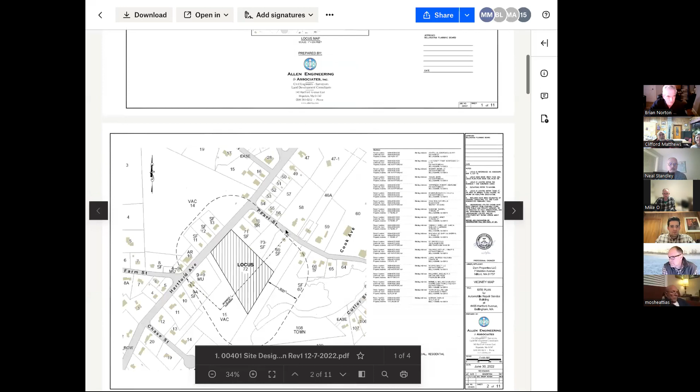Certainly. Okay, Noel, you on that? Yes, you are. Okay, everyone see this? We can. Yes. Okay, excellent.

So one of our big plan revisions was in the back of the lot here. We bumped our limit of work outside of a 50-foot buffer zone to this IVW back here. You can see the little grass icons, that's our isolated vegetated wetland. And then this ND line, that's the no disturb 25-foot. And then we have an additional no disturb area out to the 50-foot buffer due to an old certificate of compliance condition that we're adhering to, to stay outside of the 50-foot buffer zone of this IVW.

And then, as we've known before, there's this additional no disturb area in this hatched area and another no disturb area over here. So we've removed work from this area. There used to be parking lot within this 50-foot section, and that's been pushed out of the 50 now. So in order to do that, we had to propose a retaining wall. So now we have this retaining wall back there with the main development over on this side and natural area over here.

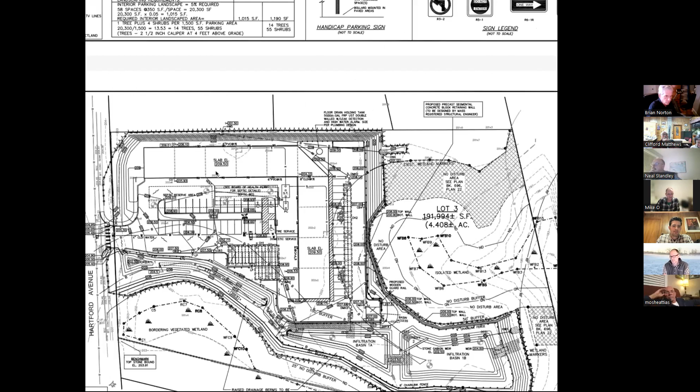Additionally, on my part with the wetlands side of things, we added mitigation plantings for our disturbance within the 100-foot. We added the mitigation plantings within the isolated wetland, within the buffer zone to the isolated wetland, and within the bordering vegetated wetlands over here closest to the road, as well as in the 25-foot no disturb buffer zone we beefed up. So we have a planting plan down here that shows the plantings in these areas.

So I picked these spots because closest to the road, that area has some bare spots where we can add in some plants and create a more robust buffer zone between our stormwater systems over here and the wetlands here. And there's also space in the wetlands themselves to add in some plants to really create a little robust wetland area here so that it can protect the rest of the wetlands further away from the road.

Then over here in the isolated wetland, if you guys have ever been to the site, it's kind of a barren isolated wetland. There's a couple shrubs here and there and some red maples basically at the corners of all these flags. So there's a lot of space to add in plantings in there to create wildlife habitat and really add some protection to the isolated wetland. And just to beef up the buffer zone around it, we added some additional tree and shrub plantings around there as well. So that sums up my wetlands related tasks.

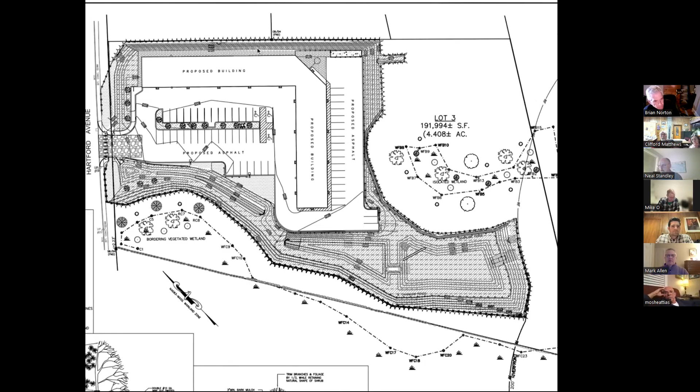Mark, would you want to take away maybe some of your comments that you addressed from the engineering side of things? Yeah, absolutely, Mitch, thank you very much. Is it possible that I could share my screen as well? Yep, let's see.

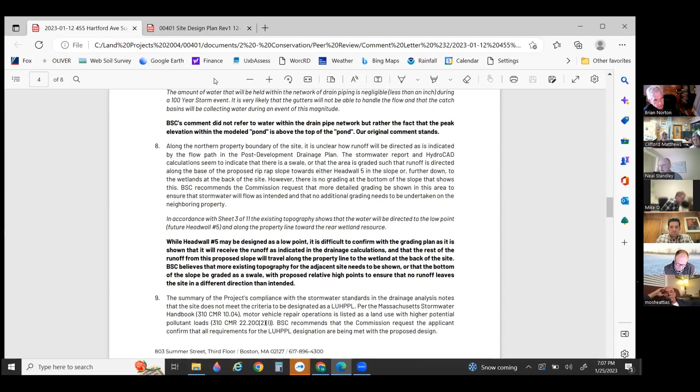Mark Allen with Allen Engineering Associates, representing Moshe Attias, following up on the comment revisions due to the BSC comments. Most notably, as Mitch indicated, this retaining wall has been shown to retain the soil from being within 50 feet of that isolated vegetated wetland.

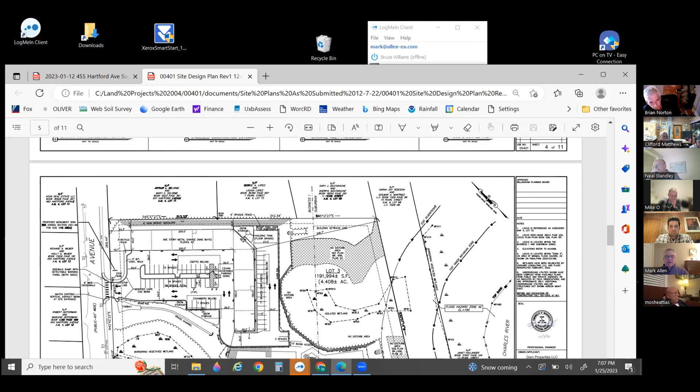That wall will need a guardrail. We've extended the guardrail along as such so as to prevent any sort of vehicular or pedestrian falling issues off that backside.

One of the other items that came out of the report was the slope along the northerly side. This is a 1.5 to 1 riprap slope. It will need to be designed by a geotechnical engineer. I've noted that on the next set of drawings. I think there'll be one more set of drawings after tonight's hearing. But that 1.5 to 1 slope is in this location.

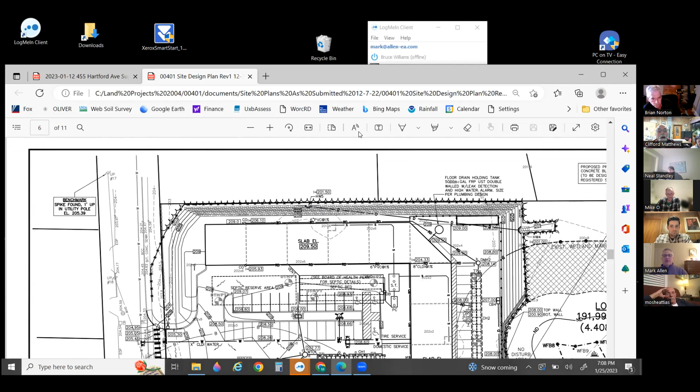Staying on this slide, there was another comment about the ability for the ground to take the amount of surface water that comes into this location. I'm going to scan down to the grading and drainage plan. This head wall is connected to this inlet. One of the comments was, through engineering, could we more accurately show either via spot shot, which is what I tried to do at the last iteration,

show more of a defined swale. So in these tiny little numbers that you see here, it definitely shows that the water will collect behind this riprap slope and into this area. But I can either add more 1 foot contours off site and simply add a swale to show that the water is going in that direction.

Yeah, Mark, if I may interrupt. I think it's important to show us what the offsite grading is, because we really don't - I don't see the numbers offsite, and I know it's difficult to get them when you don't want to go off site to shoot grades, but if there's a way that you can show, you're right on the property line. Yeah, yep. But just to the east of the property line,

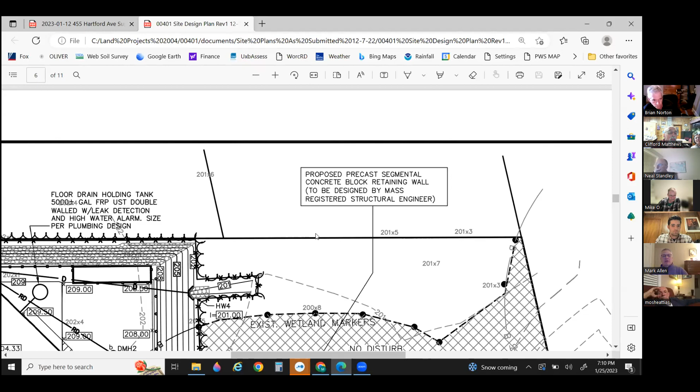I see a contour right under design. Yeah, so that's the 202. So you'll see 201.6, 201.5, 201.3. So it's very, very shallow in there. And then the 201 eventually is over here. So 201, 201.5, 201.6, 202. So the definite surface water flow is coming in this direction. No, this is an overflow. No, this is just water that comes from offsite onto site.

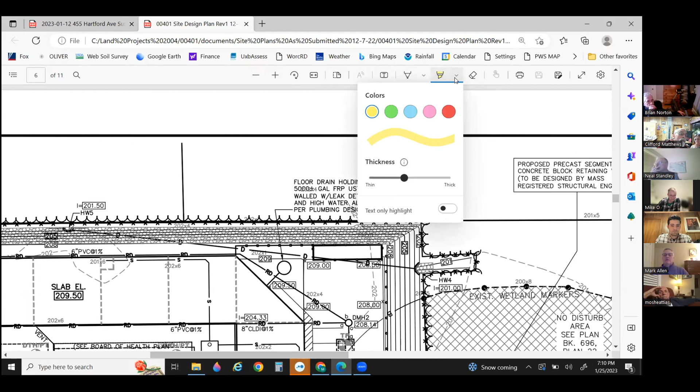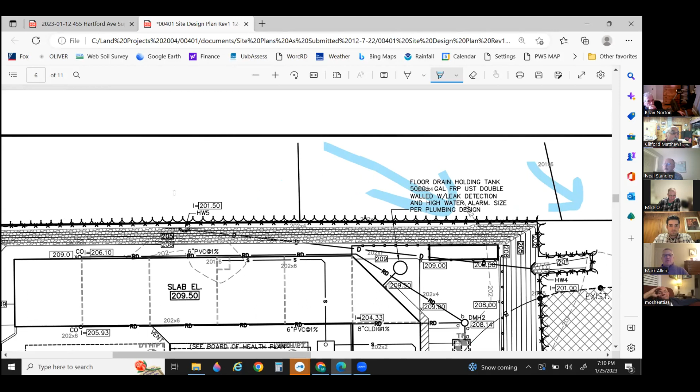Let me just get a marker - what am I missing here? Oh, okay, so the head wall 5, head wall number 5. Head wall- HW, this is 5, 201.5. Yes, okay, so that's accepting water from offsite. Yes, so as to mitigate the new development, any water that comes off site onto site, we've collected it in that head wall 5 and just independently discharged it over to our head wall 4.

Mr. Chair, quick question. Is the 201 where the inlet is, where you're drawing the arrow, it comes out at 201 at the outlet? Yes, yes. What is that length from that blue arrow you just drew to the outlet? That is approximately about 150 feet, and it's going down half a foot. Six inches, okay. What kind of pitch is that? That sounds like a long distance for only a 6-inch pitch.

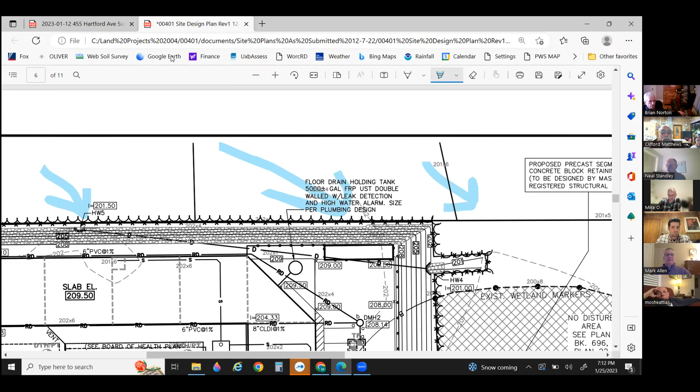Yeah, it's hydraulically modeled in the HydroCAD that's been peer reviewed as well, so I don't have those numbers right in front of me. But it does carry the water. It's likely a larger pipe, so flat slope probably determined a little bit larger diameter. Do we know what the diameter is, Mark? Let's see if I can get that for you. Let's see here.

Before I go diving into the 300-page drainage report, the other engineering question was regarding this infiltration basin. This is designed to carry all but the majority of the roof, and BSC just indicated that there's about one half of 1 inch of additional storage that needs to be mitigated in the 100-year storm. So I think just by adding 1 or 2 more chambers, we'll be able to take that half of 1 inch away in the next iteration.

So let me see if I can pan to that drainage report.

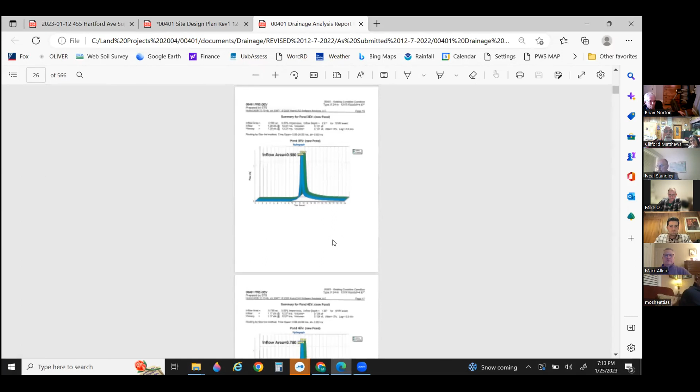Geez, you're making me dizzy, Mark. No, this is painful. Not only painful, but boring to most of those.

Only 521 pages more to go. Yeah, really.

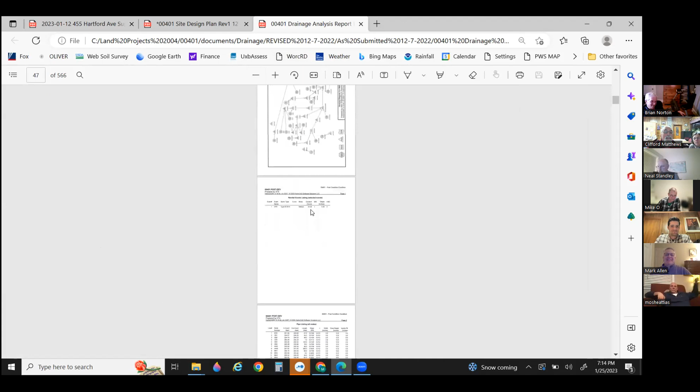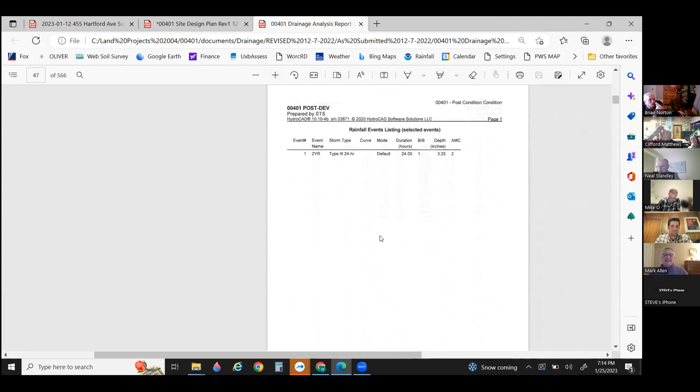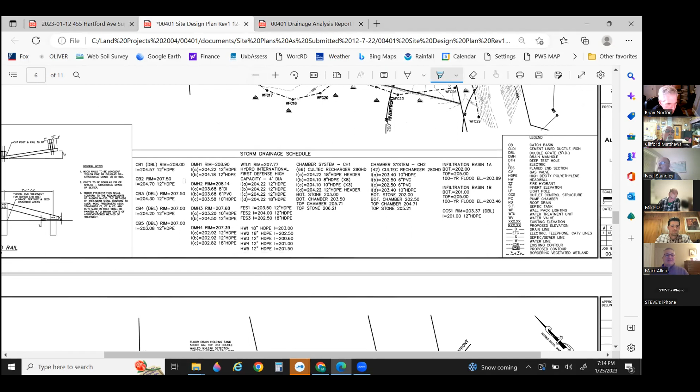You know what? The size of the... sometimes it's down here. Could it be in the detail sheet? I think it might be on this drainage schedule.

12-inch, 201 to 201.5. Okay, so you've got 6 inches of elevation drop in a 12-inch pipe. Okay, and that's been vetted by BSC. Yeah, this report has been submitted, yes. Okay.

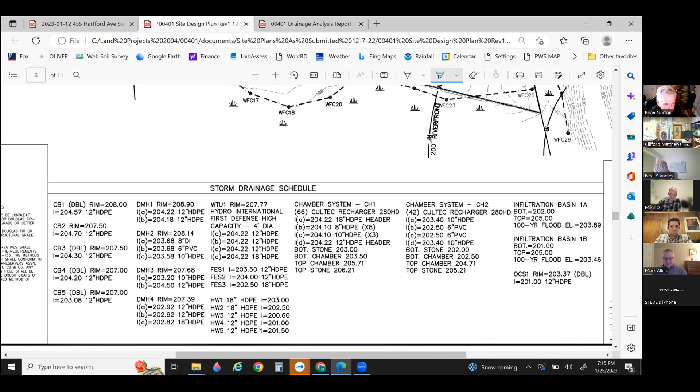So with that, I think there was one more. I think that BSC deferred to the board, the commission, about the snow storage areas discussed at the first hearing. We kept the snow storage areas in such spots that we feel they're going to get treated just like any rainwater event, so the snow storage would get into the forebays before the infiltration basins, giving that snow the same treatment as water as best we can.

Mr. Chair, quick question - of course. Do we find that to actually be an accurate statement, that it would infiltrate?

My experience is the ground is frozen, you have a pile of snow piled up on top of it, and as that melts off the top, the ground is still frozen below - it's not going to penetrate down and infiltrate and be treated. It would just flow over the surface to the bottom of the slope in this case, rather than going down into the soil, if that's what's being suggested, until the ground thaws.

So if it goes into the infiltration chambers, though, that ground is not frozen. If it goes into the open air basins, then yes, it will be collected in such a way that it'll have to wait until it thaws to be infiltrated. But generally, these basins are sand and gravel bottoms, which don't freeze as much as if they had topsoil and subsoil, so as to prevent that temporary situation - but the water can't escape until the ground thaws.

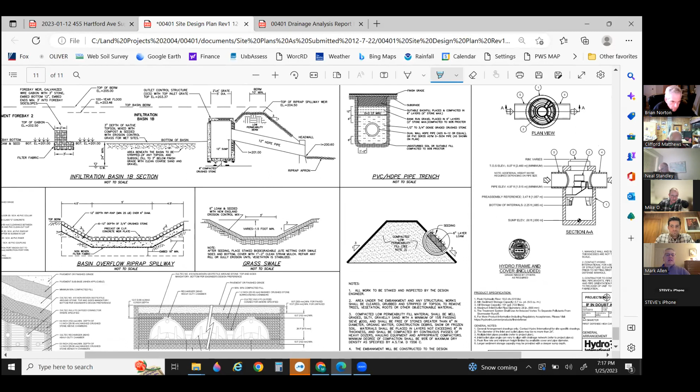Well, if it flows down the slope where the snow pile is, if you go back to the site plan, Mark, that would be helpful. Let me just make sure. Yeah, so the area beneath the basin is to be stripped of any topsoil and subsoil and filled with clean coarse sand - that's the bottom treatment of the basin.

Is that the one with the snow pile? Yeah, you had one that you were showing us with snow piles marked on it. I think there are 3 snow storage areas, Mike. Yeah, there's one right there - bottom left corner of your screen there, yeah.

And the one next to it - so those areas are going to, in a hypothetical situation, melt as the grass channel below, downhill from them, is frozen. What's to stop it from continuing to flow down the frozen surface as it freeze-thaws, before the ground is thawed, into the wetlands?

I mean, if the ground is frozen and it is piled up high enough, snow and so forth, it's not necessarily going to flow down the swale - or is that what you're thinking, that it's somehow going to flow down the swale?

It doesn't have any infiltration capacity in that grass channel - only once it gets into the infiltration basins 1A and 1B will the infiltration actually occur. So even though it may melt, it doesn't start to infiltrate until 1A and 1B, and it can't get out of these two basins until it thaws.

Yeah, so back to the grading plan, it shows the grass channel is in this location here. This is high, this is high, this is low, and it's going in that direction. Then it goes into a culvert into the first infiltration basin. 204, 205, 204, so it's got about a foot and a half lip.

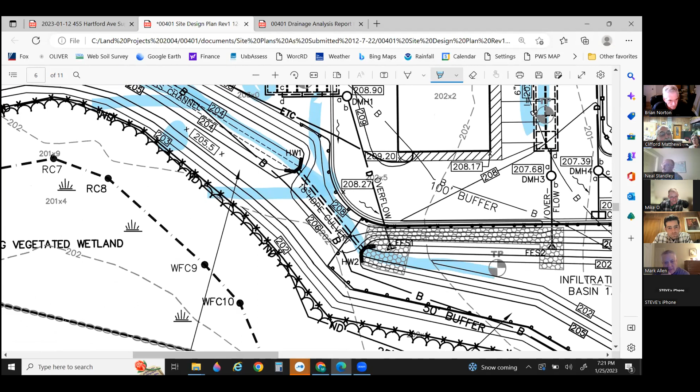That's it. Should be, try to zoom in here, like much more. Yeah, 205.5. 204 at the bottom. Yep, and I think this invert is like 203.8 or something to that effect. Not a whole lot of capacity there, and I think what Mike's getting at is...

When it comes to snow storage, we've had some bad experiences with giant piles of snow that... Yeah, this is like Home Depot. Well, yeah, that's one of them, but there are others.

One major difference, Mr. Chair, is that we usually require there be something to catch the snow and keep the snowplow driver or front end loader, if it's that much, from just pushing it and pushing it. You are right, they would hit a fence or guardrail.

In this case there's nothing there, so I don't feel the applicant is showing that at the top of a slope, given there's a little dip and a narrow grass channel a couple feet wide, but it's a fairly steep slope. What's the distance from where it says ETC, right below the snow piles, that hard line down to the bottom of the bordering vegetated wetland border there at 203? 201.9, 202. No, where it says 203, right by the blue circle.

To the right of the mouse a little bit more. Right there, yeah, from that line there, roughly up to the top of where the plowing stops, up there where the plows roughly end, what is that horizontal distance? How far is that? It's probably about 25 to 30 feet. We've got 25 to 30 feet with, is that a 5 foot drop? I can't say the 208, but it says ETC. 5-foot drop.

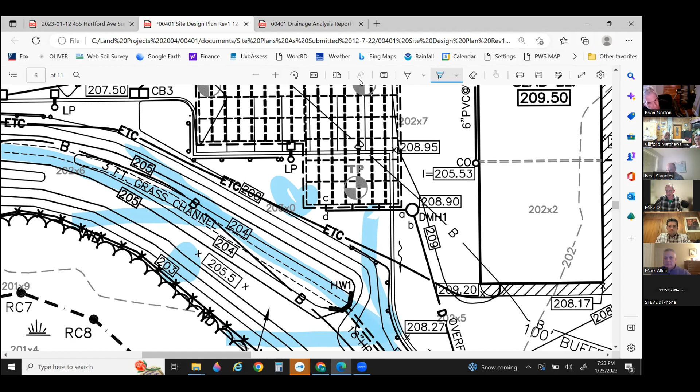Yeah, I mean, it seems like there's not anything to keep the piles from shoveling over, and there's not any way, because we don't have a back fence or guardrail, for the snowplow service or owner of the property to realize they now have to start carting stuff off site because they've exceeded the snow storage capacity area. That's going to be a requirement, correct? In the operating conditions, that if they exceed the snow storage capacity, they're expected to take it off site, correct? Yes, absolutely. But my point is, how will they know that?

Because they could just keep pushing it, it's just going to cut down the hill. As someone who plows snow, I understand that as the snow starts accumulating and the piles get bigger, you push it to spots where it disappears, and that means down the bank.

Normally, Mark, what we do is have some sort of barrier to prevent exactly that occurrence. And this is a tight site, with a lot of impervious material in that small area. So my estimation is that there's going to be snow removed from the site, unless we have a winter like this one.

Yes. So I'm going to highlight the guardrails that are part of the design right now. These are the guardrails that are in place today, so we don't let the plows flagrantly just dump wherever they want off the side of the curb.

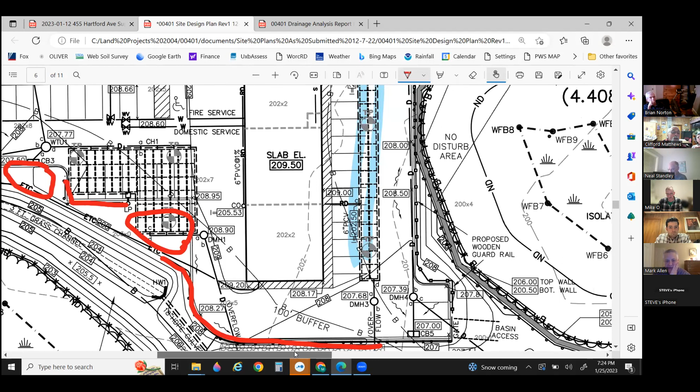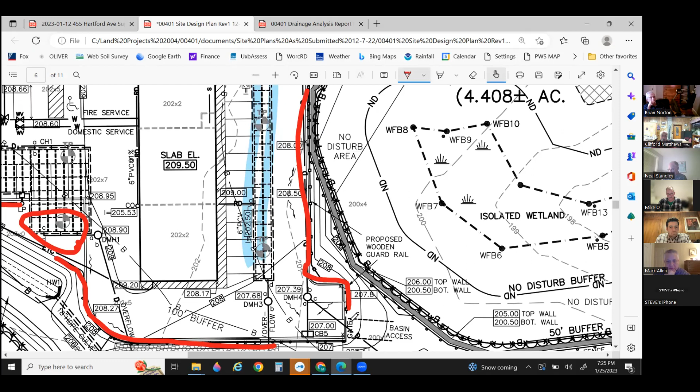We've designated these smaller areas to be the snow storage areas. Right, without the guardrails. Correct, continuing through there, but they should go through there, because with site management, they're just going to push the snow, unless you're in there with a loader. In some cases, we've seen people use loaders to lift it over the guardrail.

Right. But again, I think the overriding intent is just that stormwater gets into this system, and snow is just another form of stormwater. We want to make sure it gets treated the same way that stormwater does.

Well, except that if they're using sand mixed with salt, then it's a direct introduction to the system without any kind of pretreatment, unless massive maintenance is going to be taken every spring.

Well, yeah, so in the cases where those snow piles aren't there, the snow as it falls and melts is going to treat all of the impervious surface, and all of that's going to get into the catch basins like they do today. So the piles of snow are no different than the treated surfaces elsewhere.

Except the piles that are scraped up with salt, sand, and oils, because in this case there's potentially a lot of oils, just residual, not that they're pouring oil or anything, but that was commented on in the BSC letter too, that garages have a higher level of concern because of all the oil, that stuff's being scraped off, and in those couple of areas of snow storage...

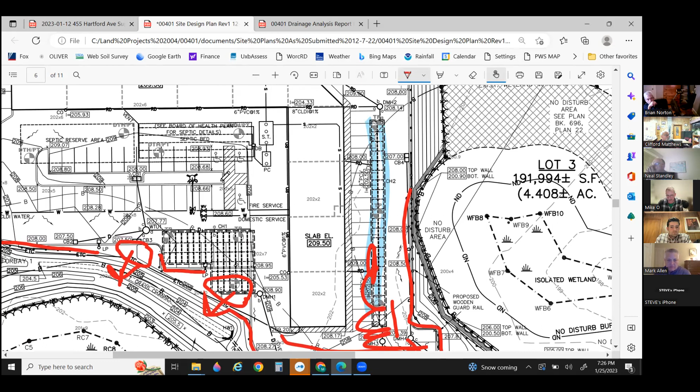They could get pushed into piles, not get pre-treated like the rest of the impervious areas, which would melt off on the pavement and flow down the drain.

So it's quite likely, in my opinion, to go beyond those grass channels. I think it's not realistic to expect that it's just going to stay at the top of the slope and not go past the channels, if piles are pushed far enough or whatever.

And then the contaminants, whatever's in those piles, is now beyond treatment and going into the bordering vegetated wetlands, just right at the bottom of the slope.

So that's where we specifically held these areas for snow storage, so that when they do melt and when they do get pushed over the edge, they enter into the area for pre-treatment, not into the areas where it would be a direct discharge to the wetlands. So that was thought out for that exact reason.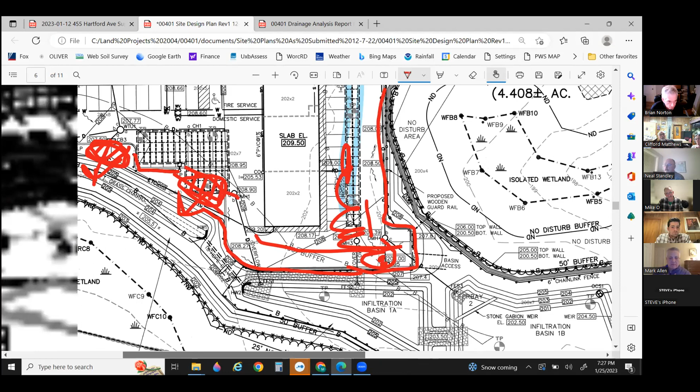Provided the storage capacity is sufficient, with frozen ground conditions in the grassy swale, to prevent snow melt from going over the top and into the resource area when the bottom is frozen. Yep, and that's through your 25-year frozen infiltration basin calculation, which we provided.

But does that account for mounds of snow? Yeah, so when the snow melts and goes into those frozen basins, the sediments and the oils obviously don't carry over the outfall. They are left in the sediment basins, in the sediment forebays, in the catch basins, and only water through higher elevations gets through.

Think of it like an oil grit separator. There's collection that happens at the bottom of the infiltration basins and the sediment forebays, and only the liquid water gets to overflow the spillway. So the contaminants you're asking about, the greases and the salts and the sands, those will all settle out prior to going into the buffer zone of the wetlands.

Well, dissolved salt, correct?

If there's a lot of salt tossed up there on top to keep cars from sliding around the corners, and it dissolves and melts into the snow and infiltrates in, it's in aqueous form, or whatever you call it... it's not a great term, not a slurry. I forgot my high school chemistry, but the term for when something is dissolved into a liquid, a solid like that, is a solution. Thank you.

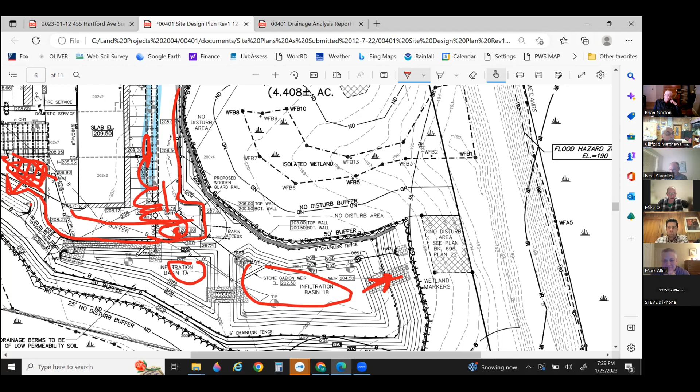Mark, could you scroll up to the top of the site here? Where's the third storage area? There's a third storage area somewhere up there, correct? Snow storage, didn't you have a third storage area, Mark? At the top? Oh yeah, I can't see it there. Up here. Oh, okay, yep.

So again, you marked the fence there, or the fence marking is there, it shows. It comes right to the end, and then to the left of where it says snow storage, where it says 20.5.

What there, is it just the fence, the guardrail just stopped? Yeah, it comes back to the building. Oh, the fence comes back, so they can't get around that, so they're plowing into a corner triangle kind of thing. Correct. There's a little bit of storage here.

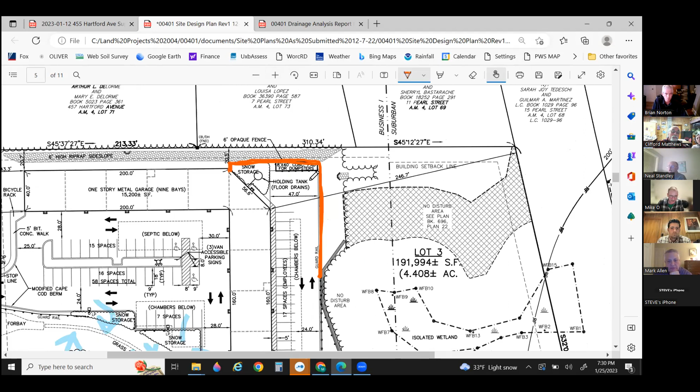Okay, I don't know much about plowing, Cliff, I defer to you, you've done it. That doesn't look like... I mean, they've got dumpsters right there too. I don't know how they maneuver the snow piles around and turn a corner with a pile of snow. You're coming straight along the back, but anyway, so that's gonna be piled there.

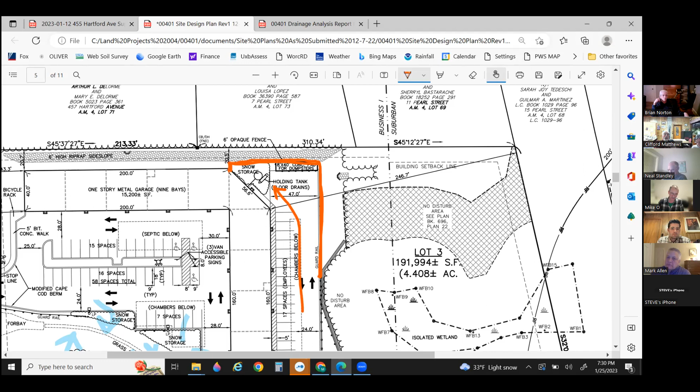There is a guardrail there to stop the plows at some point from falling over the bank and going down the riprap. Why is it that they can't put the same kind of guardrail back on the other two, at the back side or the top of the slope where the pile should be stopping, where you've got the little curly line there?

That seems to me would make us stop there. That would make me feel better, I don't know about anybody else. No, that could be added if that's the commission's wishes.

We just need a little bit of an opening to get there, but we could continue that a very short run to these two locations. Yeah, I think that's going to be appropriate, more consistent with what we've done elsewhere, where, as I said, we usually have.

It is more consistent, and we do usually mark this, but since you are going to be having it with the guardrails, a couple of like 3-foot or 4-foot high signs saying do not plow beyond this point, so they don't lift it up and over, would be good to have in those areas. Sure.

That's again consistent with what we usually require. Okay, so...

We spent most of the hearing on snow storage. We have another hearing. There's a couple of things that I wanted to highlight, and a couple of these, Mark, are planning board issues, and I know that you'll be meeting with them soon.

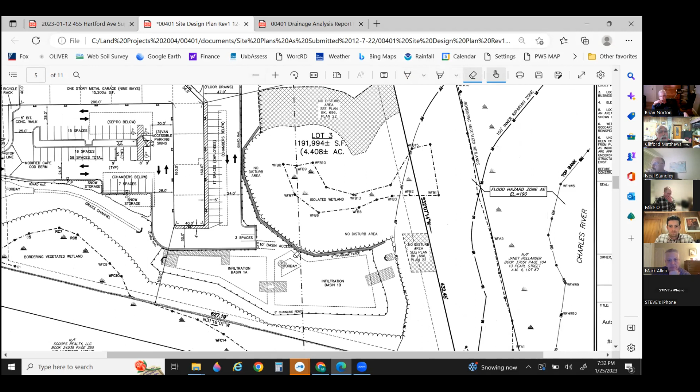But just to reiterate, the planning board requires 3-to-1 slopes under stormwater systems, and I know that you have 3-to-1 slopes on the sides facing the wetlands. I don't know whether or not that meets the planning board criteria, I leave that to them.

Along with the construction of basins above grade. I know that in the past they've been careful about not allowing basins to be built above grade. And another planning board issue was the fact that they require fire access behind the buildings. We're not dealing with those items, but I wanted to mention them because these are things you'll have to deal with the planning board.

But one of the things I did want to talk about is your square footage. I was working off, well, I don't know which plan it was now. So I did the calculation, and my calculations came up with 15,200 square feet. And that's what was on the plan.

I was just doing the square area of the rectangles, and then half of the square of the area where that one little corner piece is. I did it a couple of times, scaled it out, and I came up with 15,200 square feet. It's on sheet 5. It was on sheet 5... and I don't know where he is. Sheet 8.

Sheet 9, going the wrong way. Now we're on sheet 5. I think it actually quantified it. Yeah, there it is. It's right there, 15.2. I measured that and I came up with that, but your response was that it was 14,492. I don't know where that figure came from, or what the table is. The parking - let me just double check. It may have been an architectural modification. I can definitely circle back.

You can do that at the next meeting. We're gonna have to continue for a couple of revisions. So if you would just address that, because I don't want to belabor these points. I know we're waiting for you to respond to the peer review, but as always, the peer reviewer has their comments, we have ours. I'm just trying to give you, in a public forum, the concerns we have, and we're going to ask for forbearance for the next hearing.

You talked about the water service. You're going to have to reach out to the DPW. Have you done that yet? We have not. We're going to talk to the planning board tomorrow night, collect their thoughts, and make one collective revision after tonight and tomorrow night, and other town agencies.

In addition to the frozen ground conditions and retainage, there's a 25-year storm event with a freeboard of a foot for the 100-year storm. And there was something else I had. Standard 5, higher pollutant loads - I think that was the extra stuff that I had.

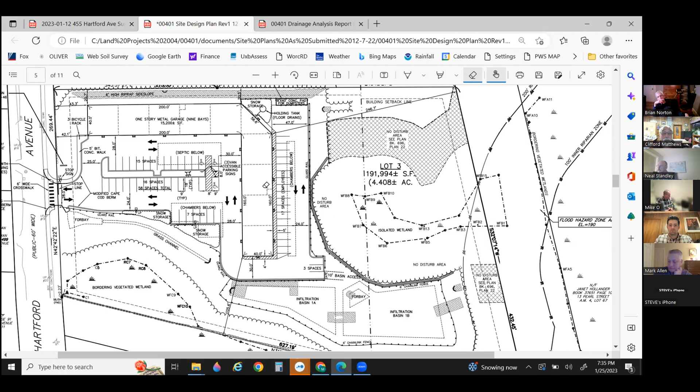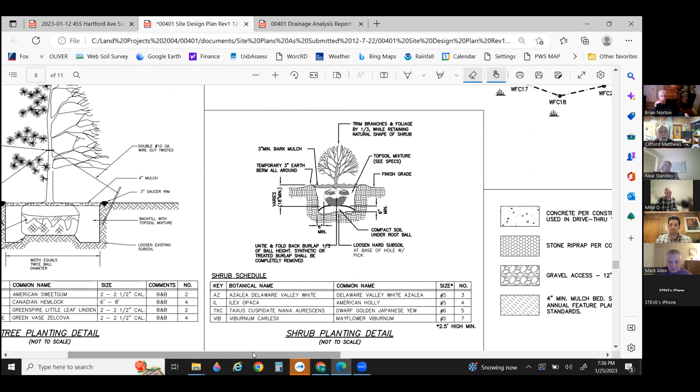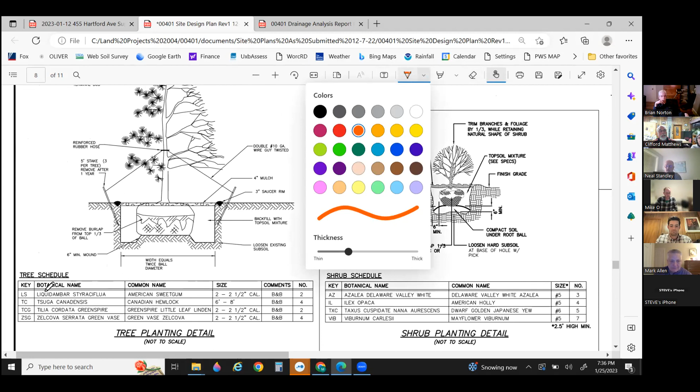I saw that the peer reviewer had a comment relative to the woolly adelgid and hemlocks. We have one hemlock on our property, completely isolated. I haven't seen one within half a mile of it, and they found it. I don't know how they do that, but we're gonna ask Mitch to see if he could find something a little different.

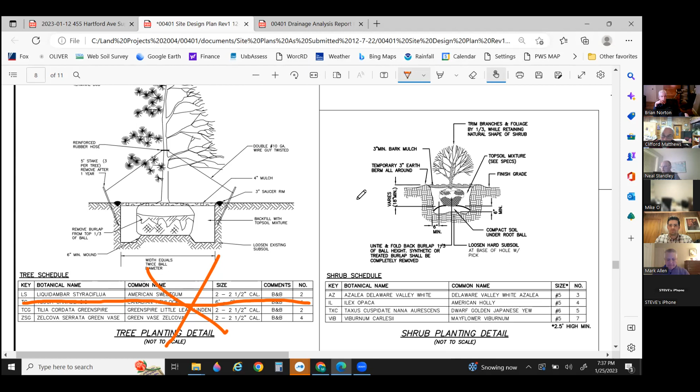I'm sorry to dump all of this on you, but as I said, we do have another hearing. This is really the first time that we've had a chance to sit down and digest some of the information you've provided. Are there any other comments from the commission on this?

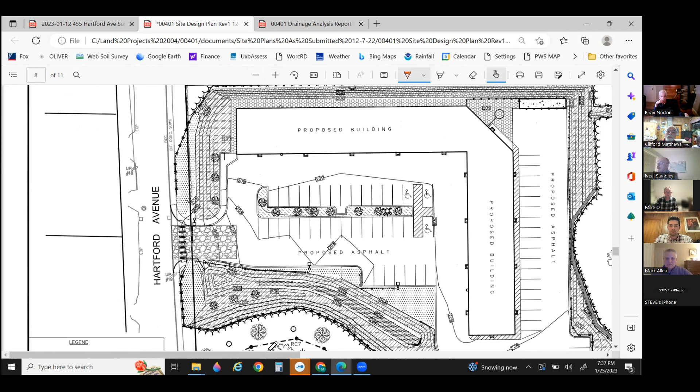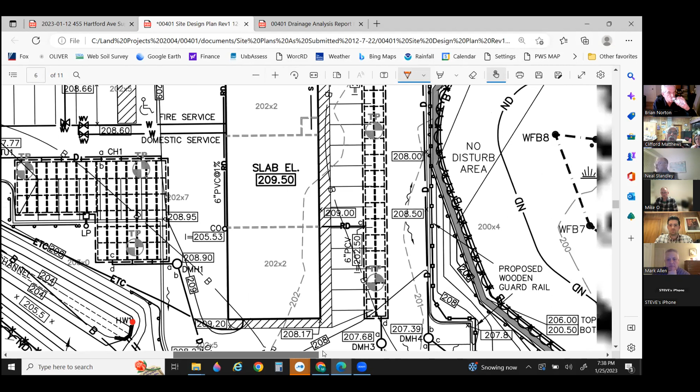I have one, Mr. Chairman. I'm concerned about the proximity of constructing that retaining wall all the way along the edge of the no-disturb zone. We've had recent incidents where they built a wall close to a line, and we're always assured the construction won't go over the line, but it always does. So I want to make sure there's enough space left between the base of the wall and the line for construction to occur without crossing over and causing alteration beyond that line.

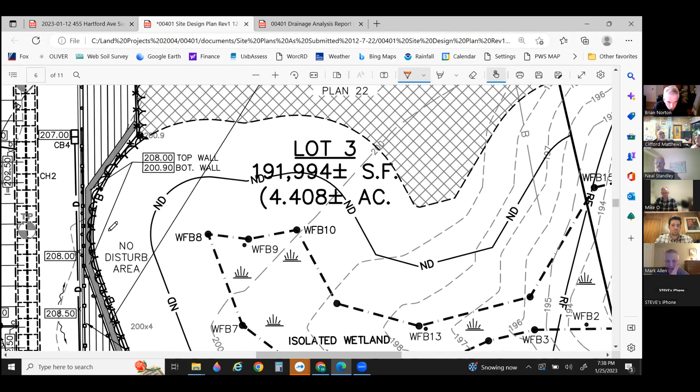What I did, through the chair, is I've actually - I know that comment has come up in the past with other projects - so I set the base of the wall a few feet beyond that line. I think you've conditioned projects in the past to have that line staked out, hay bales and erosion control barriers installed, reviewed, inspected, and a witness site visit made to ensure everything's in place prior to any wall construction. So we did anticipate that comment based on prior projects in town.

Thank you. And it'll be constructed obviously from the upslope side. Yes. I have just one more observation, and I forgot to tell you - Mark, if you'll move to the eastern side of the site, right where the infiltrators are.

Okay, keep going. So you have this storage chamber for in-ground, for in-shop... it's some sort of a wash down chamber.

If you could just move it down a tad more. Oh, the other way, yeah. What is it? Okay, floor drain holding tank. Oh, it's a 5,000 gallon tank, double walled with leak detection.

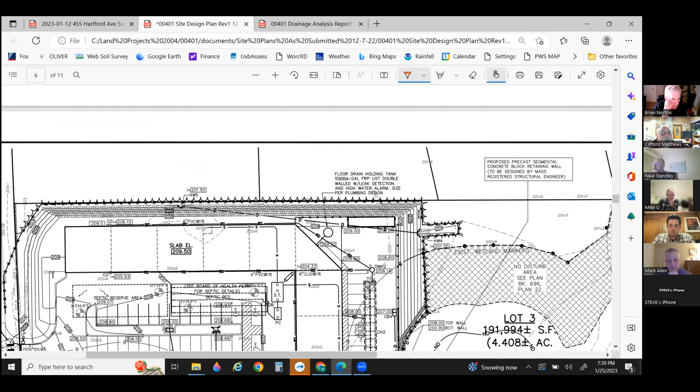I didn't find any details on that. If they're there, tell me and I'll look again. I didn't see them. Our concern is we don't want the thing to be, I don't know how tall it's going to be, how deep it's going to be. I don't want to see that in groundwater. If I don't have a detail for it, I can absolutely put one together for you. I thought it was just an oversight, but something we want to take a peek at.

Mitch, Mark, do you think that you'll be ready to answer some of the questions and we can continue the discussion?

Well, we have 6 things on for the 8th. So you're going to respond in writing. It seems like you have a good handle on what the peer reviewer is asking, then we can take a peek at your responses and see if there's anything else.

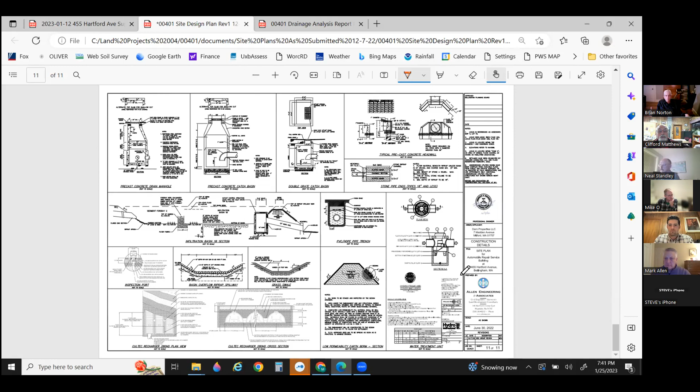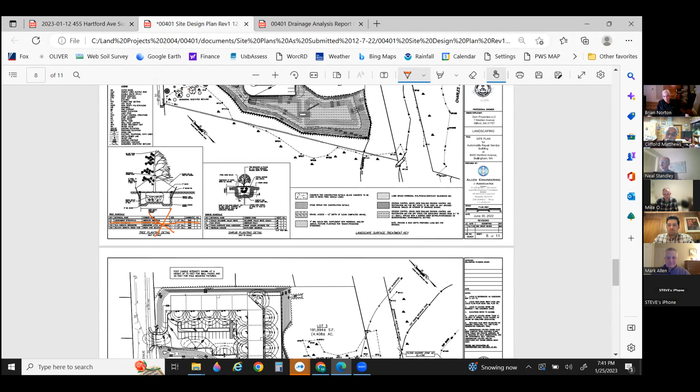I'm not sure when we can get out there, Mitch, but like I said, we want to go out there and take a peek at what you've proposed, and find a time when there's not snow. We've had 4 or 5 site visits so far this winter, which is amazing. We'll give you as much lead time as we can, but it's going to be based on the weather. We don't want to have to wait until March or April if we can help it.

So if there are no further questions, would the purpose of those be looking at the areas they want to do the plantings and just that, or is anything else? Well, I think it might be helpful if they stake out the closest areas of impact in grading, but I think the primary purpose of the visit would be to look at the enhancement areas to make sure there's going to be no damage occurring within the isolated vegetated wetland or the 25-foot no disturb zone if it can be done without alterations. That's pretty much the purpose of that.

That sounds good. My suggestion would be to expedite the site visit for both us and the applicant, if they can put a few flags like they do for markings, maybe not something pink or yellow that's already out there, but just in the general area where they're going to be doing the plantings, we could zero in on them more quickly too. That wouldn't impact the wetlands, just walking in there and hanging a couple flags. You don't have to do stakes or heavy duty stuff, but there should be something they can hang, so we have an idea visually as we approach the area.

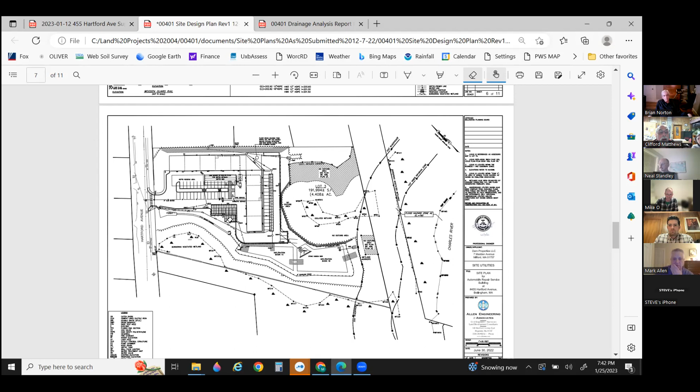Mitch, are the flags for the isolated vegetated wetland in the BVW still in place? Do you know? Yeah, they should be in pretty good condition. I hung them pretty recently before the notice of intent was filed, so it's been a couple months. And is the 25-foot no disturb zone marked in the field? Do you recall? It is not, no.

If we can find the area where you might be accessing the isolated vegetated wetland and maybe mark that off, or we bring a tape and tape it off if the flags are there, as long as we've got some kind of point of reference. I think, like the commission is suggesting, we just want to make sure that the proposed plantings can take place with a minimum of alteration to the 25 to 50 and the 0 to 25. Is that right, Mike? Yeah, that's it.

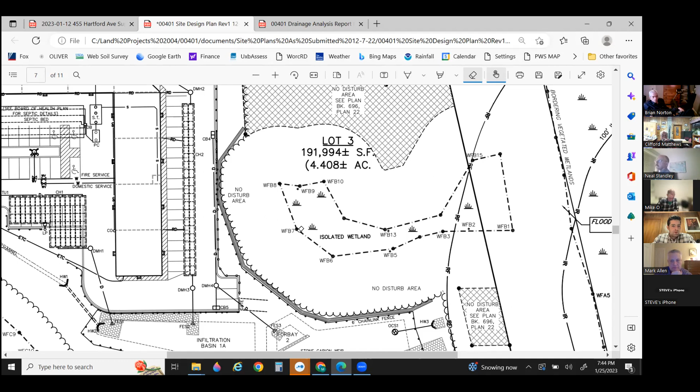Okay, thank you. Yep, whenever you guys want, set it up and I'll meet you out there. We'll have some flags poked in the ground, and when I show you the area, you'll see there's some space there for these plantings. We can either have Moshe have a contractor come out with me and do the plantings together, or if Moshe wants, he can have my crew go out and do it. We have some kids go out there and dig with us and just put the plants in, with pretty minimal tread within the wetlands. We've been in some sensitive areas before with that crew, so they're pretty well experienced with caring for native plantings already in the ground.

So, I look forward to the site visit when you guys get a chance. Perfect, and obviously the work will take place under your or someone credentialed like yourself's supervision. So we'll all be happy with that. Great, yep, okay.

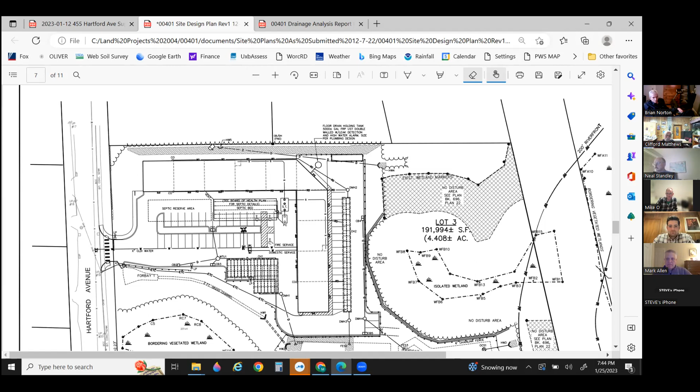That being the case, I'll entertain a motion to continue the hearing to 7 o'clock on the evening of February 22nd, and to conduct a site inspection as conditions allow.

So moved. Second. Brian, is there any further discussion?

I will call for my roll call. Ariane, aye. Noel, aye. Michael, aye. Brian, aye. Neal, aye. That's a unanimous vote.

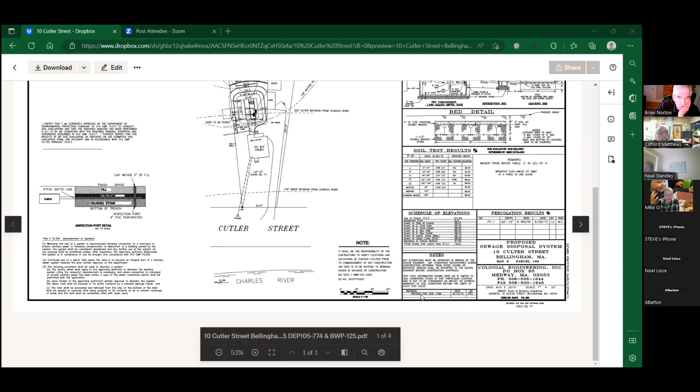Mr. Chair, do you want me to share? I was going to ask, I got it Steve, right here if you want it. Steve, you're on a phone, can you see the proceedings on your phone? I can just, I saw the last one with what he was showing, but I can see you. Okay, that's good. Here's what we're gonna do, we're gonna have Mike pull up those plans for us. But we want new plans, we want the new plans. I think these are them. What's the date on it? 23. December 9th, 2022, is that the one? I'm looking, hang on a second, let me just scroll over. No, that's the original, that's the old one, is there another one? Okay, a second, that's the old one. Should say proposed structure, plan of land. Proposed addition plan? That's it. All right, yep, yep. I got to turn it, hang on a second, yep.

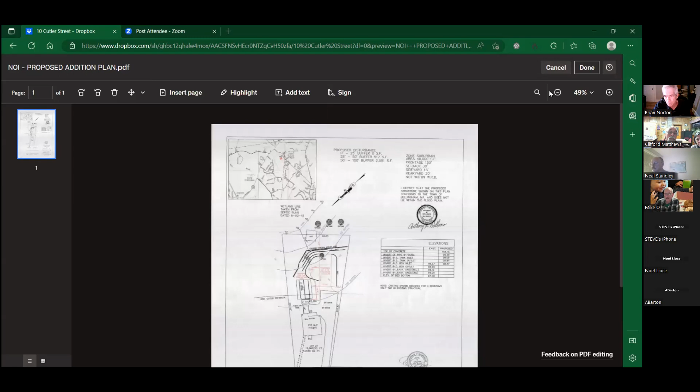And we'll zoom in a little bit here. Plan is not so good. Oh, I think if you just enlarge it, we'll be right. Hey, you got it. Okay, there you go. Tell me, can you see that parking lot good? Yeah, that's good, right there.

Okay, so what happens here is, it's a red line. Now, we looked up the filing we had in 2015 for this lot, and it's a 1,500 gallon tank. The existing tank is 1,500 gallons, correct? Right, and that's for a 3-bedroom home. Right, and the home has only 2 existing bedrooms in the structure.

Well, I guess what happened was there was a bedroom downstairs. Now, Steve, it's being assessed as a 3-bedroom home, and the system was designed as a 3-bedroom home, right? Yes, it was over designed for 3-bedroom. It was our understanding it was classified as 2-bedroom during the process, when it was previously approved. Okay, so it was built based on the '15 filing, which was for 3 bedrooms.

Yeah, so the top right corner of that plan, if you zoom in on that, it should tell us. Yeah, we just want to make sure, because you know what happens, Steve, people will get in. And we don't have a problem with in-law apartments, we just want to make sure that the wastewater is properly treated. That's all. I can appreciate that.

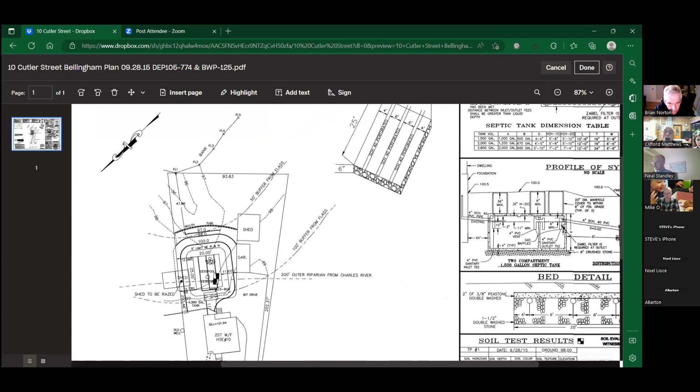So there's the trenches, but up in the right-hand corner would give you the calculations. It would tell you the 4 bedrooms times 110 gallons all the way up. Yeah, I think it's 3 bedrooms at 110. There it is, that's it. I can't read it, so. All right, well I'll read it to you. I'll take your word for it.

Oh, okay. So the bottom line is, our question, Steve, is that leaching field will accommodate the extra bedroom. That system is designed at 330 gallons. Each bedroom is 110 gallon design, so that would be equivalent to a 3-bedroom design. So the leaching field is designed for 3 bedrooms, and the property is listed in the assessors for 3 bedrooms, and they're adding a 4th bedroom.

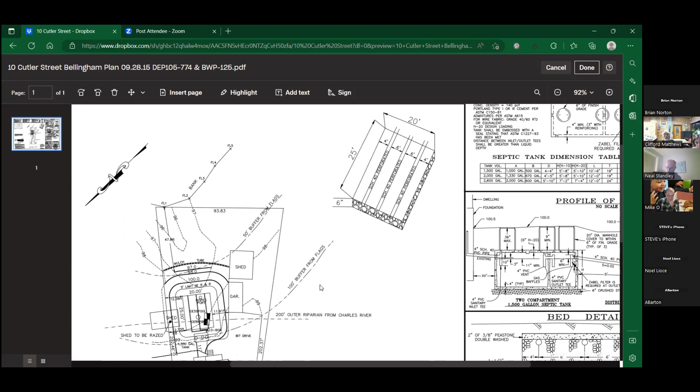So the question is, there's 3 bedrooms currently in the house, but if somebody moves in and puts a bedroom downstairs, then we have 4 bedrooms, and the leaching field is going to be undersized. Is that right? Technically, yeah, if you add an extra bedroom. I mean, you can have 10 bedrooms in a house, but if you only have 2 people, obviously you're not getting the use out of it.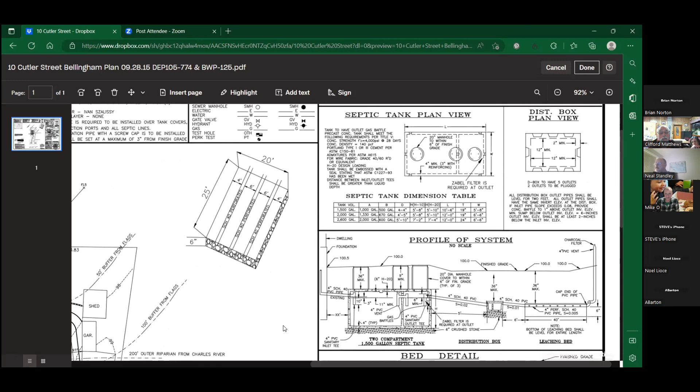I mean, that's one point, but if that was the case, it would shorten the life of the system over the years, and if they would do that, they would be incurring costs sooner than a normal system. Okay, well, we're getting more answers now than we did from the health agent. I mean, I spoke with Paul because I wanted to walk into this and be up on it, and his understanding was a 2-bedroom. He even put the note there on the elevations: existing system designed for 3 beds and only 2 in existing structure.

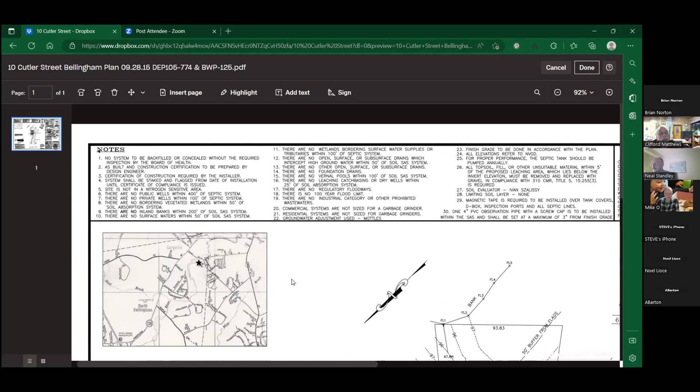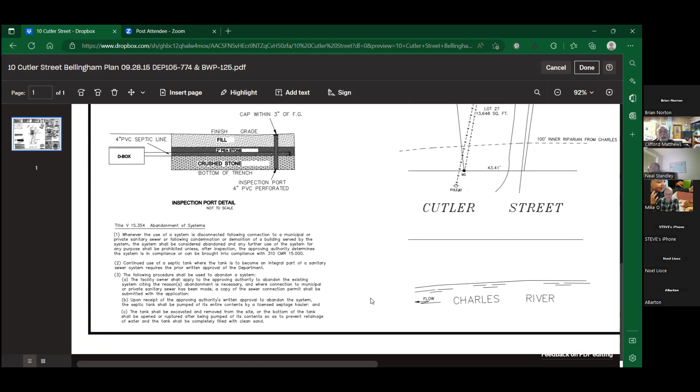So I don't know if him and Bruce Wilson are on the same page with that. And, I mean, they have their classifications, how every town's different on, so they have room counts. Usually if it has a closet and it's a bedroom, I mean, any structure, I guess you could add another bedroom, no matter where you live, got rid of a study. That's always plausible. So I can only go by what I was informed of, that it's a 2-bedroom existing structure. The system was over-designed, and it should handle 1 additional bedroom.

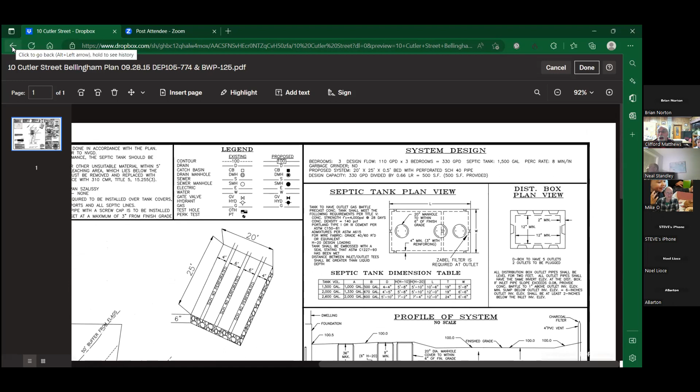All right, Steve, here's what we're gonna do. I think Bruce is gonna look for a floor plan. And I'm gonna ask, because I know our administrator talked to the health agent when this was first filed, and our answers were not clearly addressed. So we're making progress here tonight. I'm gonna ask her to talk to him again and make sure.

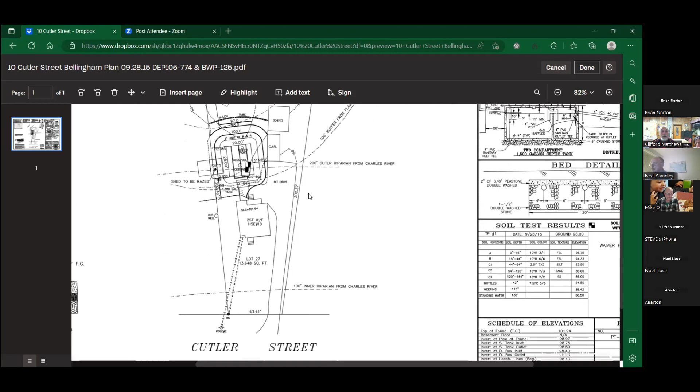Steve, what we don't want is someone to sell the house. They got an in-law apartment, they'll have 3 bedrooms and a bedroom in the in-law apartment, 4 bedrooms total, and the system fails in 2 years. We don't want that to happen. No, we don't like when that happens either, it doesn't help anybody. An ounce of caution is worth a pound of cure, I guess.

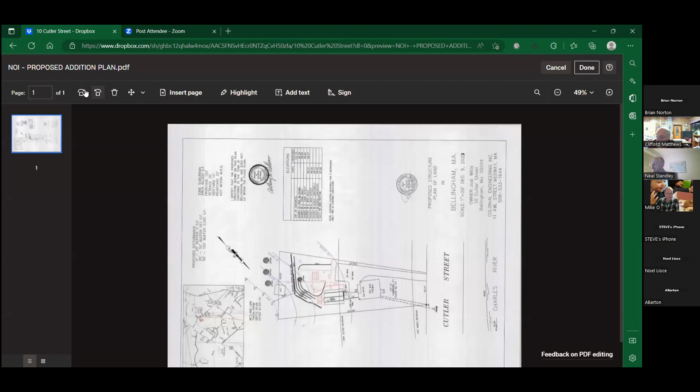Well, I'm glad you see it that way. Now, here's what we're gonna do. I have to look at the wetland line too. If the commission's okay with it, the administrator and myself will go out and take a peek at the wetland line. I think we did it not that long ago, but we'll take a peek at it again. And if you guys are okay with it...

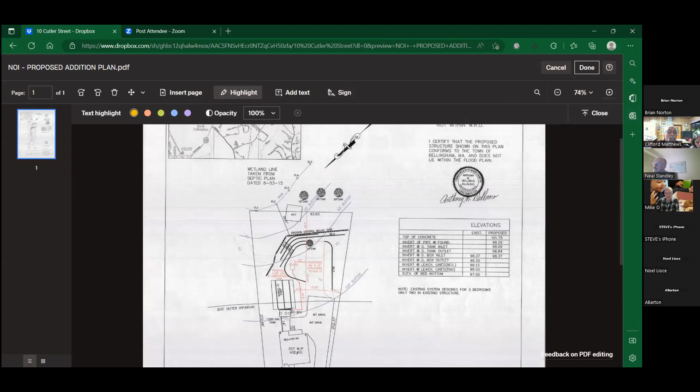Mr. Chairman, yes, I have a quick question. There's a hut shown on this plan within the 25-foot zone that is not on the other plan you were just showing, the original plan that showed a garage and a shed. It doesn't even look like it's on the lot. Well, it looks like it's half on the lot. Oh, yeah, all right. And on the original plan there was a garage and a shed, but no hut, and certainly not in that location.

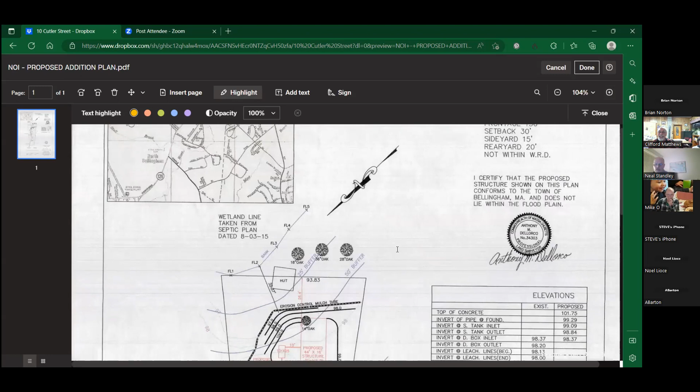So when you're out there looking at the wetland line, I don't know if you could have a look at- We'll look at the hut, whether that was a permitted structure, whether it is a structure. I addressed that with Paul earlier today, and it looks like somebody threw something together. I kept questioning whether it was a shed, and he said well, I wouldn't really call it a shed. So I don't think it's much of a thing, but it is there. That's why we put it on the plan.

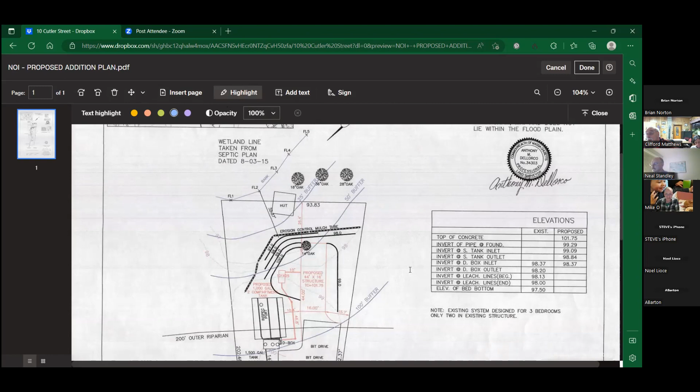Well, it must be new. But Ian and I will take a peek at that, and hopefully we can get this all resolved so we can wrap up the hearing at our next meeting. Others can go look at it too, on their own. Yeah, that's a good point, that's pretty close to where you live, Neal.

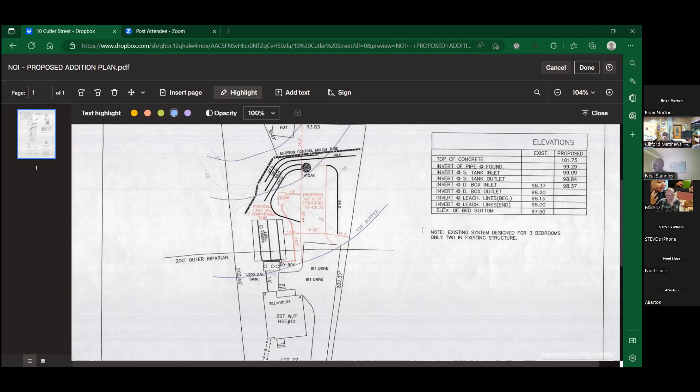People are free to go do it on their own time, at their will. So if there's any other- I would like to confirm with Paul that there's still some flags there. This was taken from the recent plan from the last filing. So if not, I'd like to send my crew out there to rehang those flags where they originally were. Yeah, let's make sure the flags are still there before we go out.

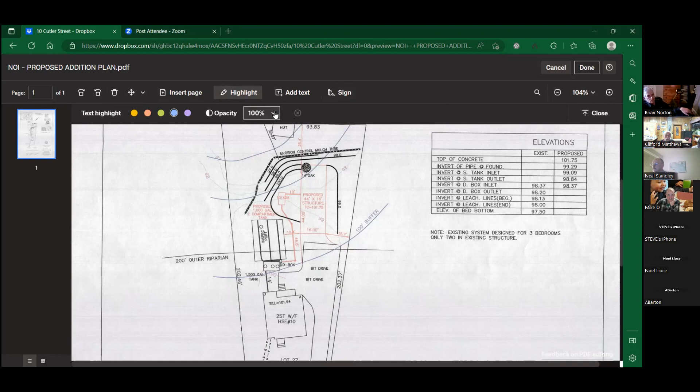Right, okay. Okay then, Steve, let Ian know- or have Paul let Ian know. Yeah, okay, sure thing, no problem. You got the DEP number we sent you, and copy of the green cards? Yes, we do. Thank you. You're welcome.

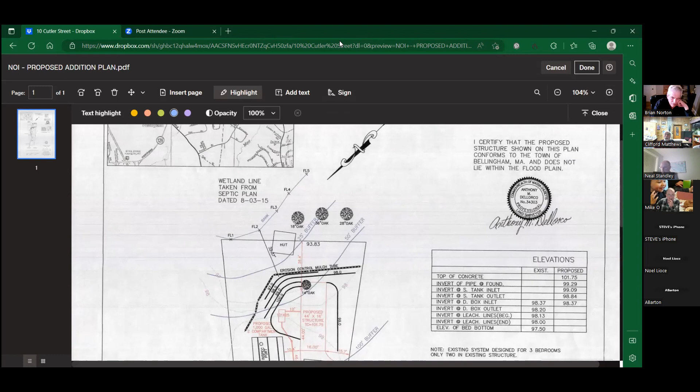So I need to ask for a continuance. Could you please continue this meeting? Sure. I'll entertain a motion to continue the hearing to the evening of February 8th at 8:30. So moved. Second. Marianne, Mike, a lot of folks have left, but I think I can determine the vote. Any discussion? All in favor? Aye. Aye. That's a unanimous vote.